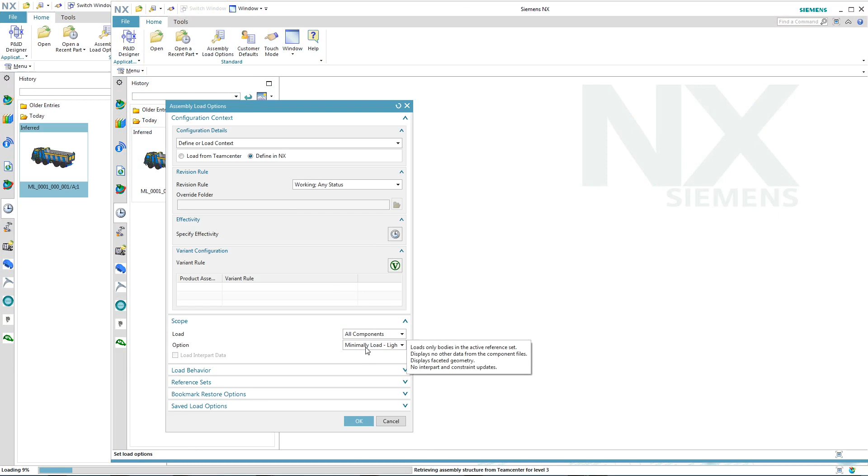So first of all, we'll open up the truck assembly with partial loading, in effect the old way. As you can see, it started. We're now going to access and open a second assembly, the same assembly, but with minimal loading set. And as you can see, we've started that off too.

The first thing you'll notice is that the assembly navigator gets populated directly. And we can start to go in there and expand some of the nodes and see what's been currently loaded and what's still waiting to be loaded. This is new capability with minimal loading.

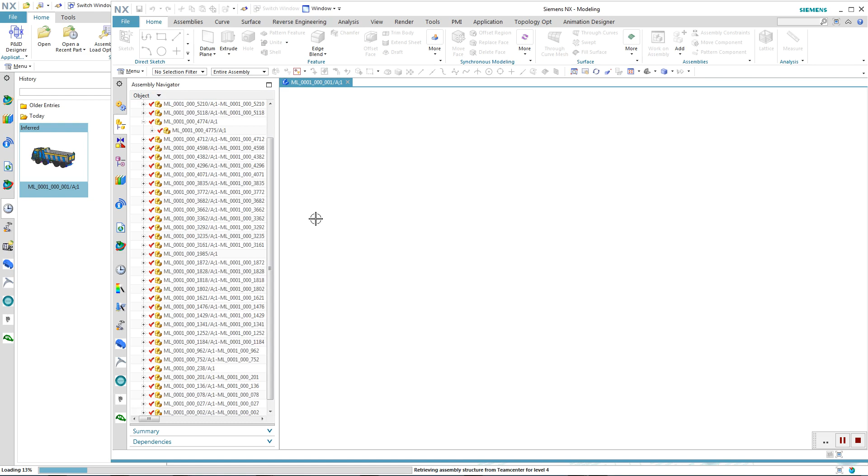As we go through the load process, each one of these nodes will start to be loaded, and we should see some of the geometry appearing on the screen very soon. Some of you may already have noticed the pause and stop buttons at the bottom right hand corner of the graphics window, but more of this in a second.

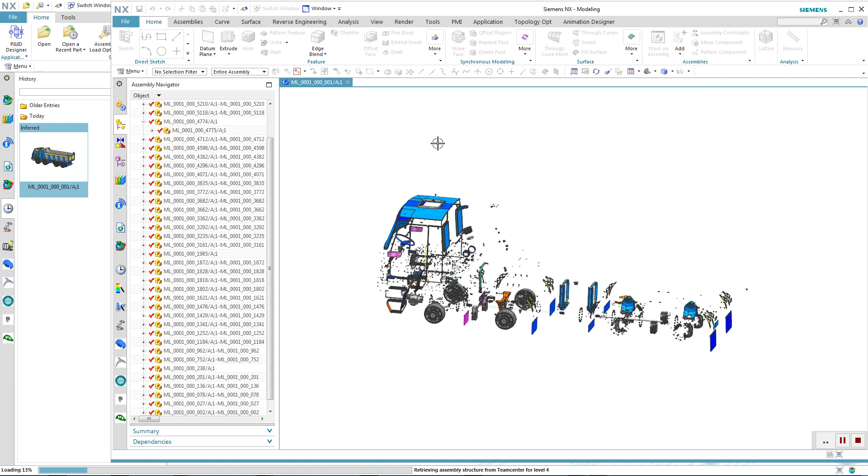You can now start to see geometry appearing on the screen, but not only that, we're now able to interact directly with it. So in this case, we can start to rotate the geometry to get a better position.

We can pause the load, and this enabled us to select geometry if need be and actually remove it if it's something that we don't really want to see.

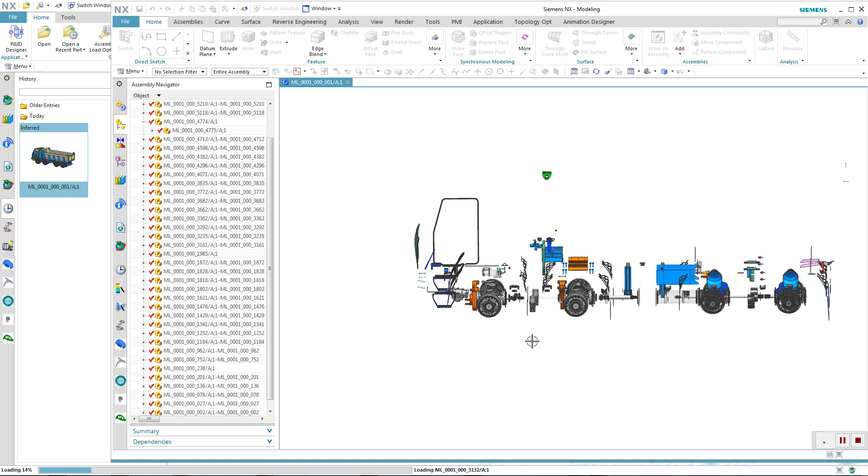We can then continue the load and again maybe rotate the truck assembly into a specific orientation.

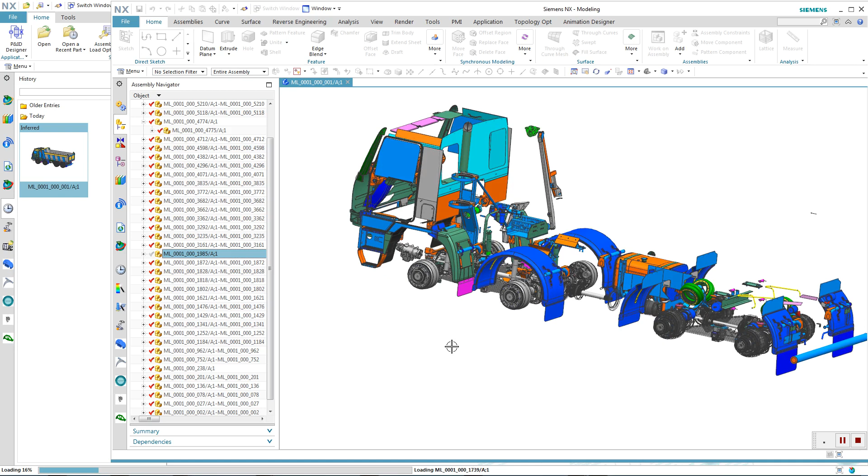Also notice how we can select geometry directly from the assembly navigation tool, and in this case we're going to hide the engine because again that's something that we don't necessarily want to see for this particular process.

More and more of the data is getting loaded. Again, we can select geometry individually, so if we look at all the tires, again we can hide those from our view.

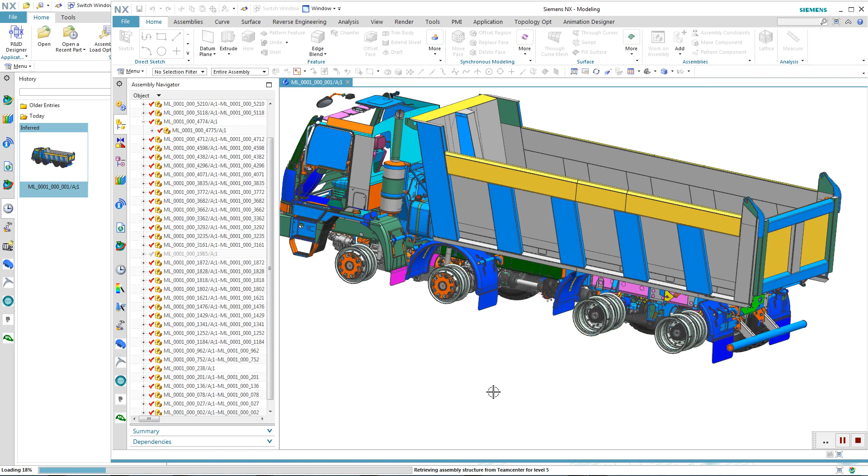And all the time, more and more geometry is being loaded. We could continue to interact and remove further geometry if need be, but for now, we'll let the load complete.

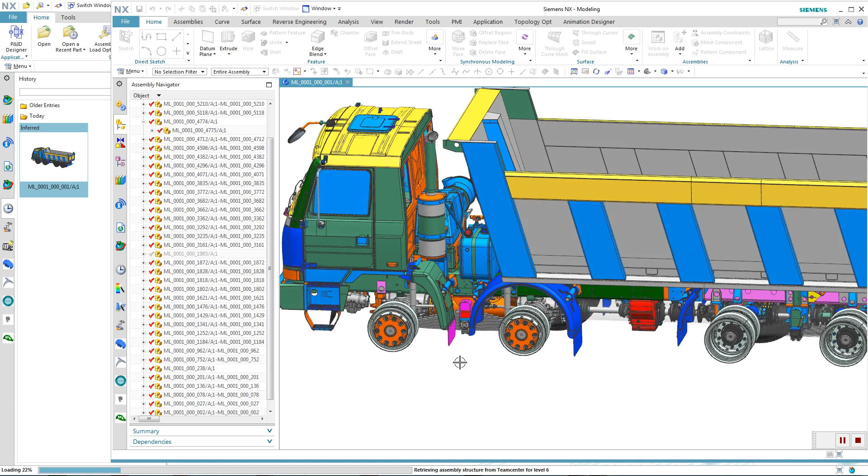For reference, you can see that the first assembly load we started is still only at around 19 or 20%. So with a minimal load session, we'll continue to orient the truck geometry, again, whilst it's still loading, and get it in a position that we can use for some downstream activities.

As you can see, our original load is still at around 27 to 28%. And now our minimal load is complete. So what can we do?

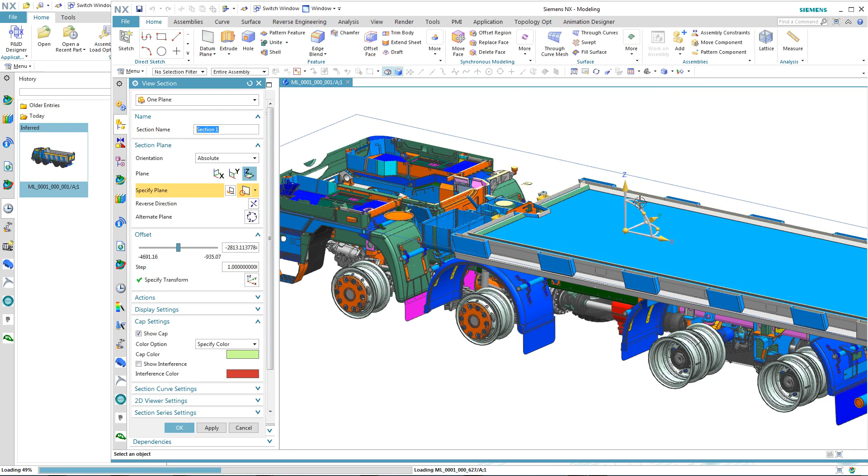Well, one of the first things we can do is to look at section in the geometry. And this gives you an indication of how complete and complex our assembly structure is.

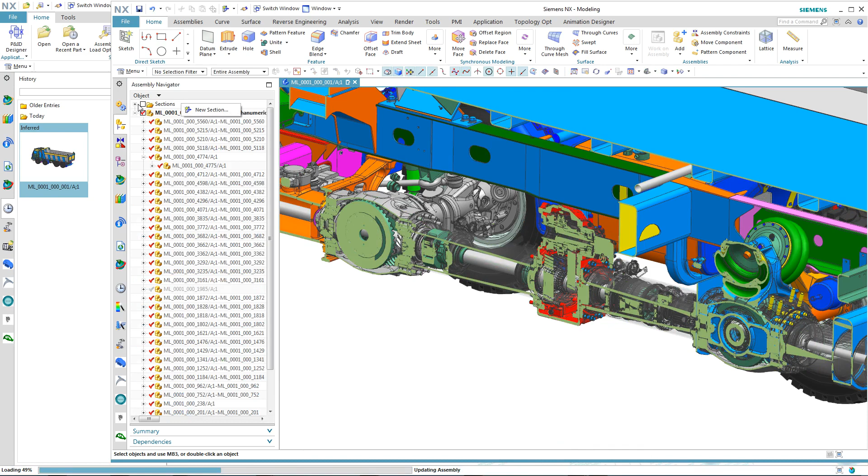So even though we're using minimal loading, we've still got all of the tools available to us to interact and interrogate the geometry. Let's switch that section off.

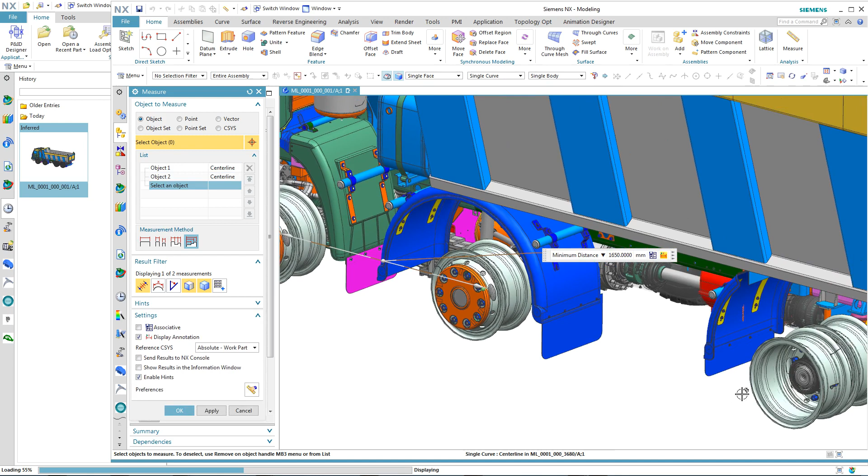One of the things I may want to do is to do a measure. So again, in this particular instance, we're going to measure between the wheels. So again, we just select the geometry and continue to select the wheels and get some sort of idea of the wheelbase that we've got on this truck.

And all of these dimensions are accurate.

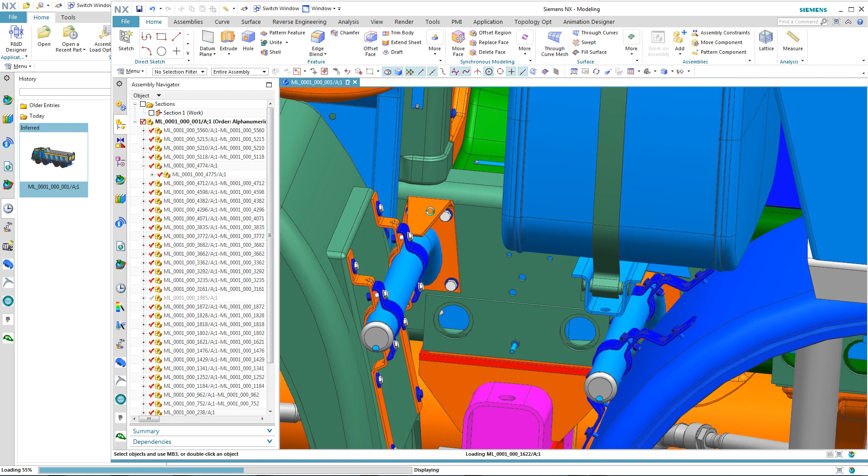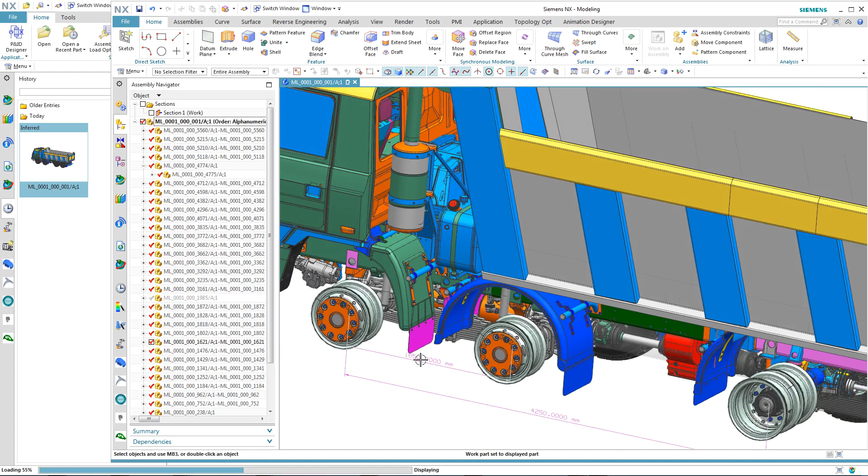We can also make design changes. So again, in this case, we're going to make a change to this bracket here. We can use synchronous technology in this particular case just to move the bracket position and just increase the size of it. Again, you notice that the first assembly that we loaded or started to load is now at 55% and starting to display.

But one thing you can see, and shows how fast this minimal load is, is that we can open the same assembly, we can interact with it directly, we can start to do some downstream activities such as sectioning or measurement, and then physically close the part before our original assembly has even loaded.

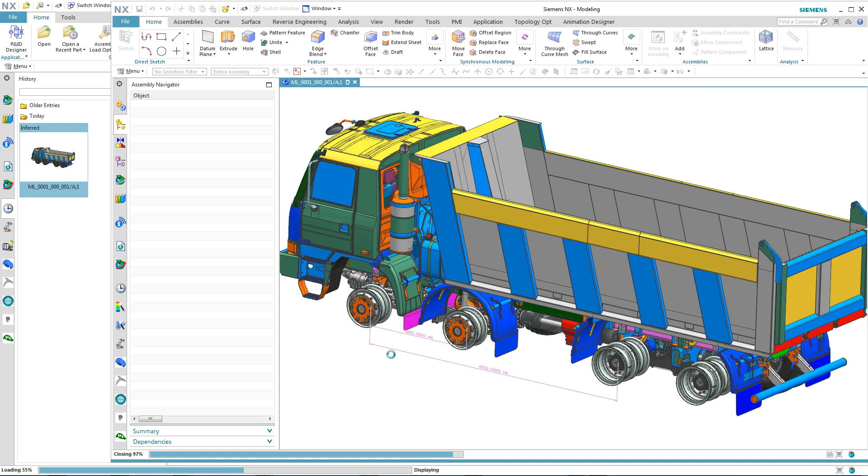This, I think, proves how more productive NX12 is with the new minimal load option.